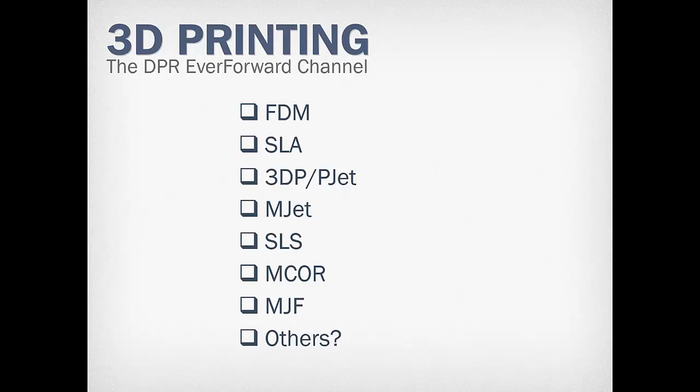So fused deposition modeling, this is a good entry point technology. I was able to print this phone case using a printer that cost me less than $1,000. And as you can see, the definition on that, and you can see the light kind of coming through what should be the solid parts and pieces. It's not an exact science with FDM. There's always going to be some noise, and you may not get the same print twice.

There are more expensive, higher end printers that do fused deposition modeling. I think the most expensive, you'd be talking about maybe a $20,000 printer at this point, but you can do more accuracy with something like that.

FDM is popular because it's relatively inexpensive, but also you can print this wide variety of materials. For example, I've made this little wood pallet out of a wood substrate material. There's also metal, conductive metal. There's different types of plastic, like food grade plastic, sandstone, rubber, faux glass. So it seems like every week there's a new material that somebody's figured out to make a filament for, and make that some other new material you can print using this FDM technology.

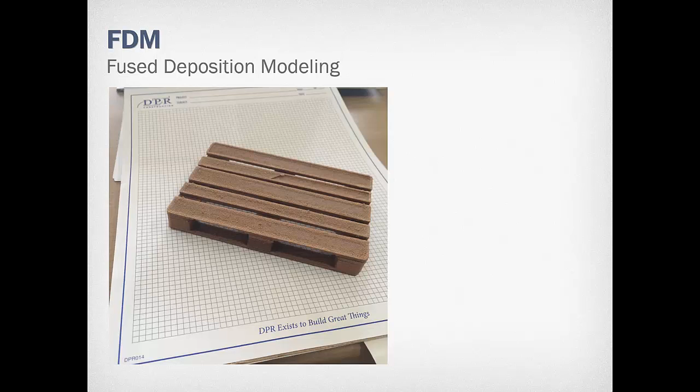There are definitely some downsides. It's not the most accurate. One common problem, as you can see in this last print I'll show you here for FDM, is how the corners on the bottom of that print all warped, and that took about 7 hours to get that thing off the machine. The corners were warped, and that made it less usable. I was also trying to replicate what was in a SketchUp file, which had a lot of nooks and crannies in this piece, and it had to print what's called support material. Because I only had a single extruder on my printer, it all had to be one material. So the only feasible way of actually cleaning out that support material would be to get a drill or some other tool and just start cutting and scraping, which kind of defeats the purpose.

So FDM, I would say, is relatively inexpensive. A lot of users, a lot of models out there meant to be just downloaded and printed FDM, but unfortunately it is not particularly fast. It's not particularly accurate, and although there are FDM printers that can handle multi-material, or print more than one substrate, they've got to be two things that print at the same temperature, which limits that. It's also not particularly easy to set up and configure the printing files for multi-material.

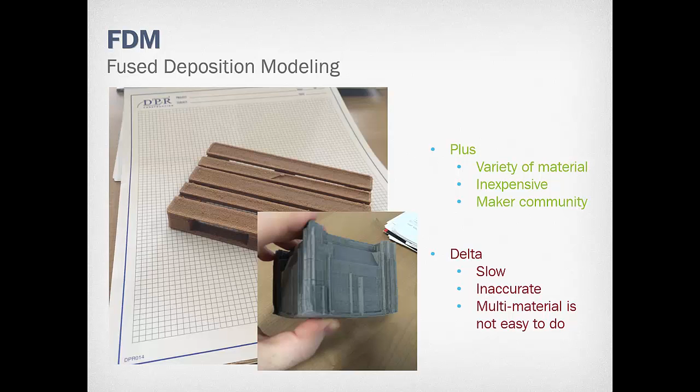Stereolithography is an exciting technology to me. It's a little bit confusing because the most common printable file uses a file extension called STL, which means stereolithography. But the technology of curing a liquid into a finished part, for some reason, although that is stereolithography, the acronym is SLA. So SLA, STL — one refers to the printing or printer technology, the other one refers to a file type, but they both mean stereolithography for what that's worth.

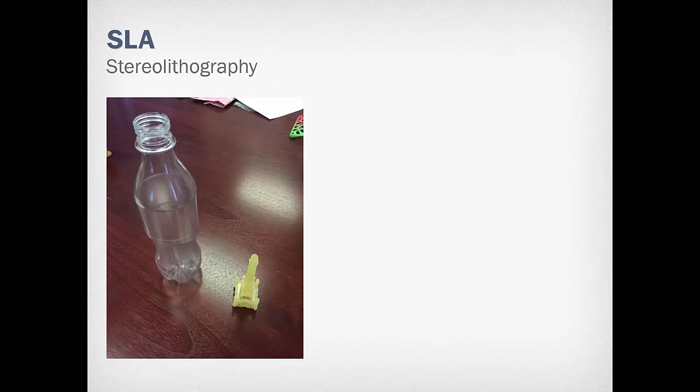This Coke bottle was printed on a very high-end, expensive SLA printer. I held it in my hand, and I couldn't distinguish it from a Coke bottle made by any other process. The smaller model was made on a less expensive SLA printer, and it still has very good detail and resolution.

So I like SLA because of the ability to print with high accuracy. Also, the material is relatively low cost, and there are low cost options for SLA printers. I picked one up for, if you can believe this, $200. It doesn't have a very large build area, but I've got at least an SLA printer on my desk.

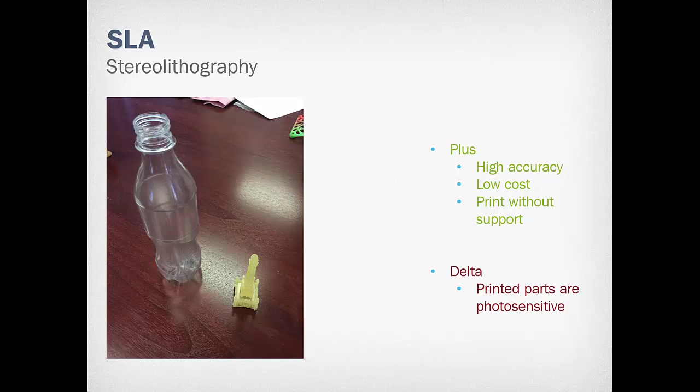But there are some things to be aware of. The liquid resin is not considered safe. You don't want to get it on your hands or anywhere else. Also, because the whole basis of the technology is light curing a liquid resin, you can't leave these parts out. This little architectural model would probably melt, burn up, or just crumble if you left it out in the sun, or on a windowsill, where it could receive too much light.

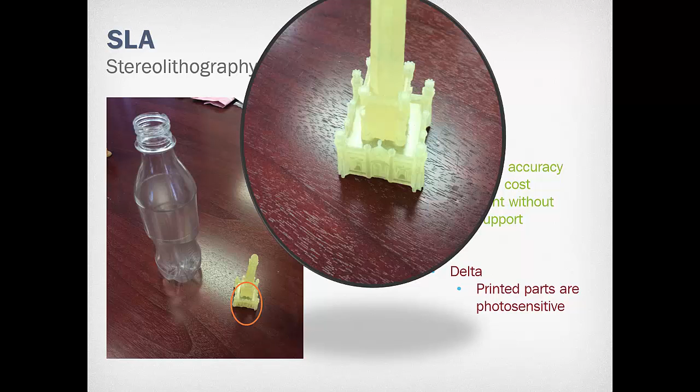I'll just show you quickly here the level of accuracy you can receive with SLA on a less expensive printer. So it's another good entry point to consider for somebody getting into 3D printing.

Now, there is a technology that most people refer to simply as 3D printing, and it's different from the ones I've covered so far. I don't think anyone's come up with a good way to explain powder and binder as a process, but essentially a commercial 3D printer that's quite common uses a powdered plaster. It puts down a layer of that, and then some sort of print head comes along and cures part of that with a liquid binder. Then it lays down another very thin layer of powder, and the binder is applied again, and so on.

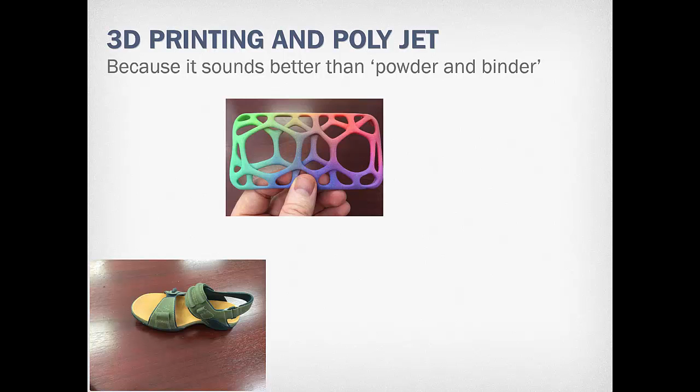What ends up happening is you have a print which contains all of the leftover powder. You can see this was an actual print that we had ordered here at DPR some years ago for a completed project, and it wasn't planned properly with enough escape holes at the bottom to get all of that leftover powder out. So at one point this cracked. You can see the powder that was left behind, and it's still quite heavy, even with as much as we've shaken out of there, because there is so much trapped powder.

So this is, again, more of a commercial process. The PolyJet refers to the ability to print color, so that's a good option. I want to say it's kind of a baseline for commercial printing. You get good resolution, good accuracy, good durability, and you get the color.

What kind of turned me off to this was the first time I went to a vendor shop and saw them printing using the powder and binder process. They had a nice showroom with this expensive machine putting together a model. And one of the sales guys said, 'Okay, now follow me.' They went into some back warehouse, and they had several stages of post-processing for the model, including dropping the whole thing in a bath of glue, some cyanoacrylate glue, for a long period of time to cure it. And I just thought, where's the advantage in 3D printing when you use this technology if you've got to take all these additional steps?

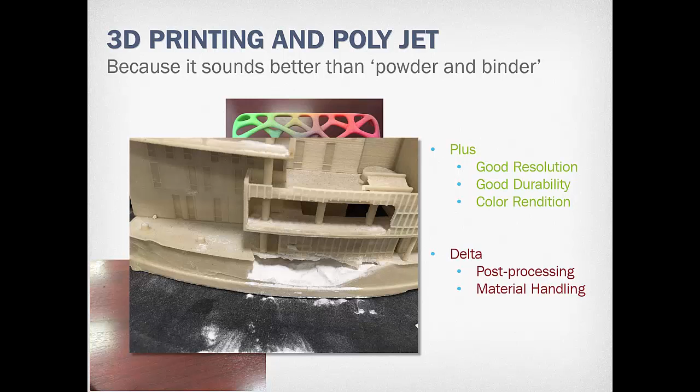So not a bad option for the commercial print house that's going to make you a reasonable model at reasonable cost. But I don't foresee most of us, either as a hobby or as an employee of a company, saying 'let's go get one of these types of printers' and then have to deal with all the post-processing that's involved.

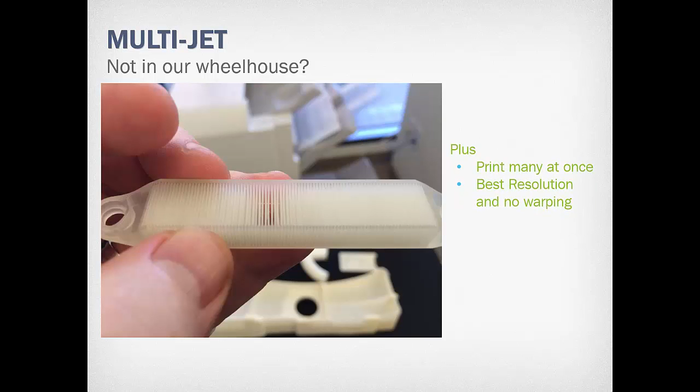Multi-jet, also not to be confused with PolyJet, is called that because it can print as many pieces as can fit on a print bed in the same amount of time as it could print one. I don't think this technology is particularly relevant to us. I think it's more for jewelry and other fine objects. You can get the very best resolution without warping, but a lot of times that's because it uses a support material that is wax, and then you have to melt out the wax or figure out a way around that.

Or it can be used for what they call lost wax casting, where you make a part out of wax, and then the intended final material takes the place of the wax, so you lose that wax. Again, not something I see a lot of advantage in for us. I mean, it's great if you had to print 100 little doodads that are exactly the same.

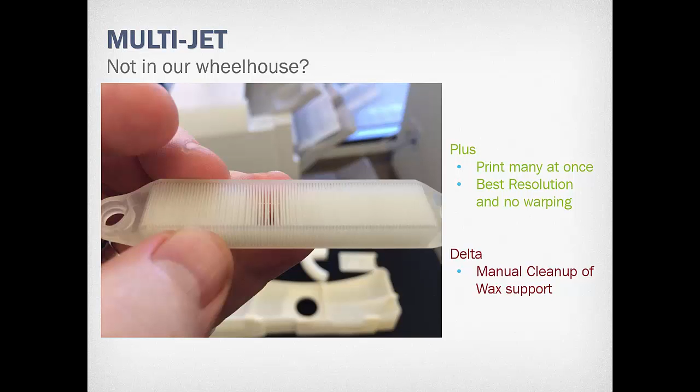And if you really wanted high accuracy, they say this goes down to about a third the width of a human hair. That's pretty good accuracy, I think. But again, not particularly for us.

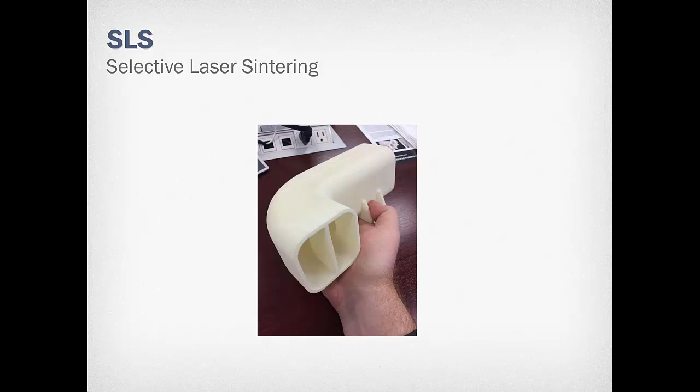SLS, or selective laser sintering, has some similarities to the powder and binder process, and also to the SLA process we talked about earlier. But really what this does is take very small, fine particles of a material and fuse them together. It's almost like welding together at a microscopic level the part that you want. And what I'm holding here in this picture is a real air duct, a piece that would go into a commercial airplane.

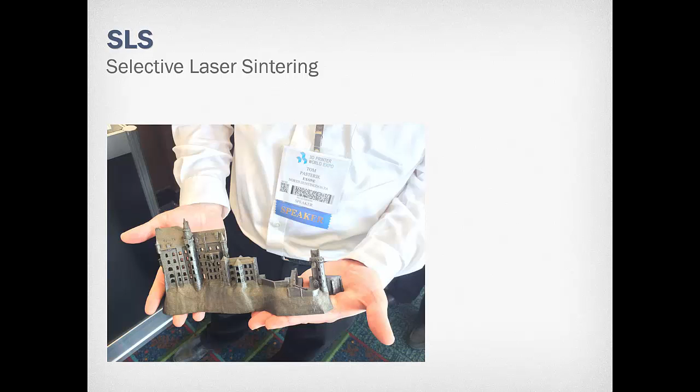You may also have seen or heard of doing SLS with metal. Unlike other versions of 3D printing where you might print some other material, like wax, and then pour the metal in and get rid of the wax, this is direct metal. So you may hear somebody talk about DM, meaning an SLS technology where they take very fine grain metal and the laser fuses it all together. You can see this building facade, which looks every bit as good as a die-cast metal part. Very high accuracy, very high strength, comes out as one piece, and uses less material than other traditional methods.

So that's some of the advantages. As you can imagine, SLS, especially with metal, is going to have a very high cost, and it's not particularly fast. It's not particularly accurate either—some of these other technologies actually get higher accuracy—but for the uses we've shown, SLS is quite good.

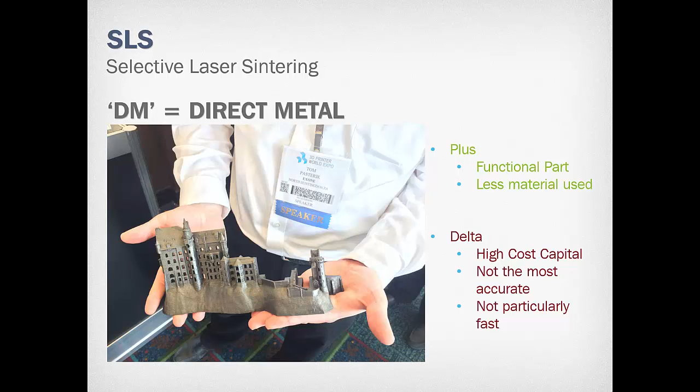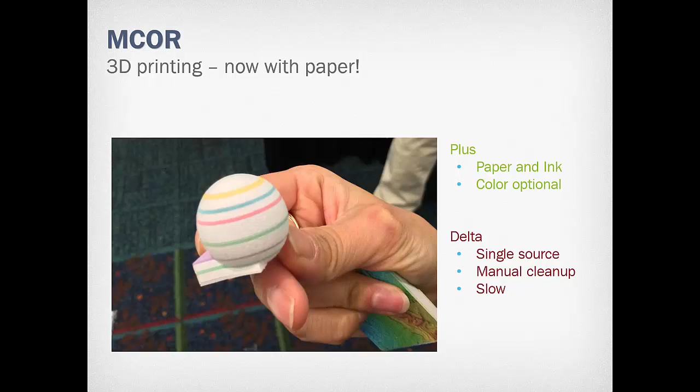So what happens is you use paper and ink, it cuts and, if necessary, colors, then presses and glues that sheet of paper onto the stack. When the entire stack has been printed, you just manually rip or pull apart the parts you don't want. Very exciting process—however, it's been difficult to track down any real salespeople for MCOR and get answers. They recently released a new desktop version of their printer technology, so I've been trying to get our hands on one of these.

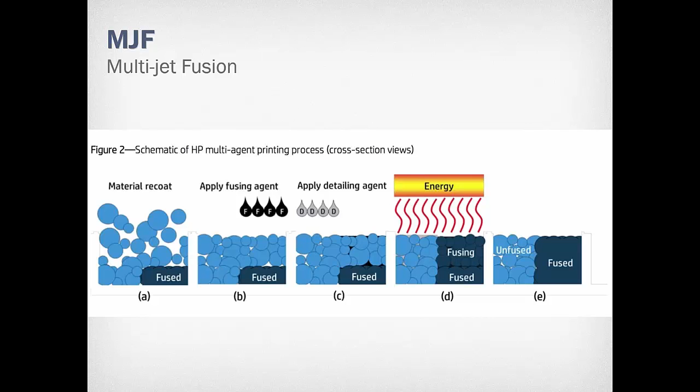Finally, I want to mention multi-jet fusion, which is really just HP getting themselves into the 3D printing game. They've been talking about this for well over a year, and I've seen some videos and examples. I can't really give you a plus-delta on this—it's still too early, and the process is still emerging.

But as I understand it, essentially whatever base material they use, two different types of liquid agents are applied and then fused. That allows for a variety of surface textures and a variety of material strength or finish as needed. Supposedly the big deal is the speed—they talk about running circles around any of these other technologies in terms of time to finish a print. So if that's the case, it becomes very interesting.

We still don't have a good handle on the price of either a printer or a finished print, or really any actual metrics or numbers on the speed. But we'll continue to keep our eyes on this technology and any others that are emerging.